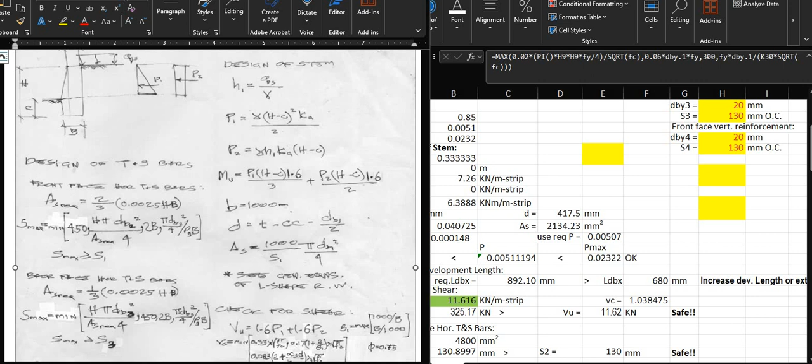For the design of gravity wall, these are the dimensions: you have the overall height H, small c for the height of fill exposed outside, thickness T at the upper base, capital B as thickness of wall at the lower base, surcharge, and then the lateral forces P1 and P2.

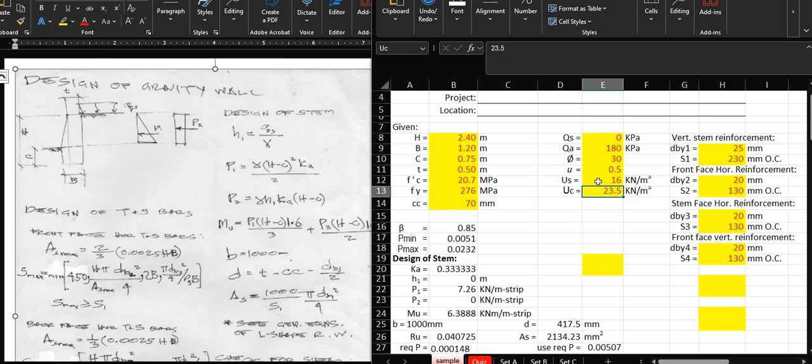Then we have thickness T, F prime C, Fy, and clear cover. Then you have surcharge Q sub S, Q allowable, internal friction phi, coefficient of friction mu, unit weight of soil, and unit weight of concrete. For unit weight of soil, that's the name I gave it.

For the rebars, let's look at this figure. dBy1 is shown here - this is actually the vertical stem reinforcement. When we say stem, this is the part of the gravity retaining wall that's attached to the soil or retained soil, so that's the stem face. The front face with the inclined part is the exposed part. So dBy1 is the vertical stem reinforcement.

And then you also have S1. Don't get confused because in my spreadsheet I put dBy1, but actually here it's dB1. So I can edit this here - then dB2.

This is the front face horizontal reinforcement, DB2, including up to the top here - the front face horizontal reinforcement. Then DB3 is the stem face horizontal reinforcement. And DB4 is the front face vertical reinforcement.

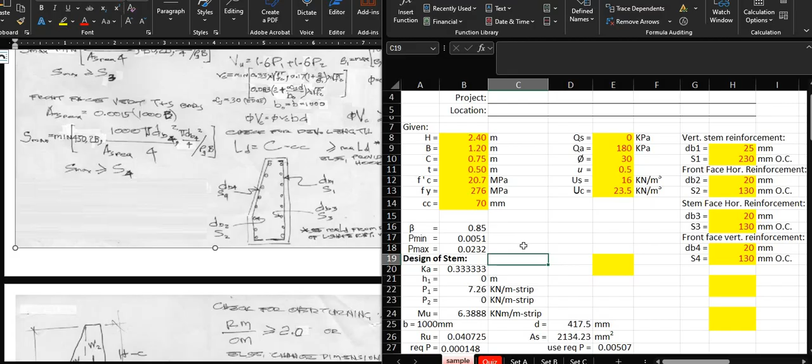Next, of course, we compute the basic constants or basic parameters, which include beta, rho minimum - these are the equations for rho max, rho min, and beta.

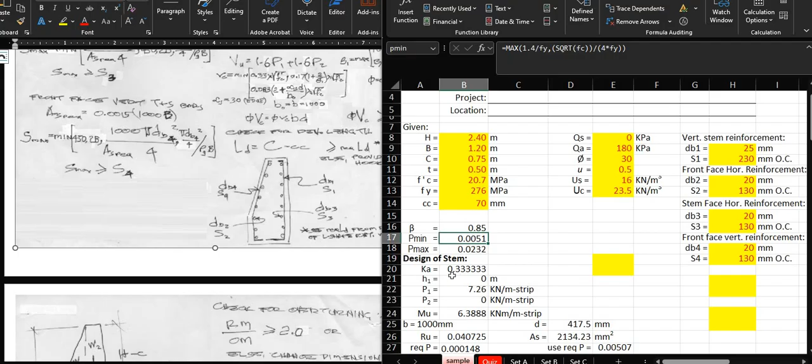Then this is step 1, K sub A. Then this is step 2. And then finally your moment. Now K sub A is 1 minus sine phi all over 1 plus sine phi.

What is this equation? It is actually the height of the equivalent rectangular polygon due to the surcharge. So the equivalent height of the polygon due to surcharge is H1. Take note that H1 is not capital H minus C - it is equal to surcharge divided by the unit weight of soil. So that's the equivalent height.

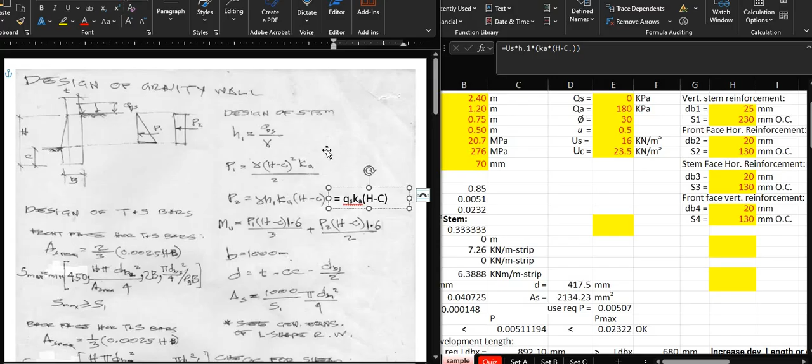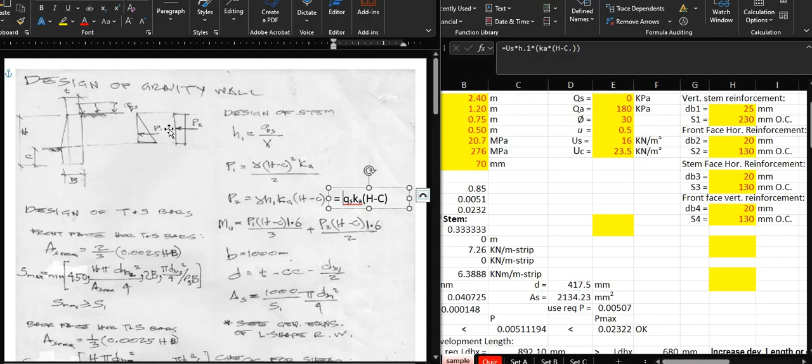So if we compute the lateral force due to surcharge, it becomes unit weight times H1 times K sub A. Why do we multiply by unit weight? Because it's an equivalent height that we converted to soil. But actually we can also go back to the original equation where P sub 2 equals surcharge multiplied by K sub A times the height of the polygon - that also works.

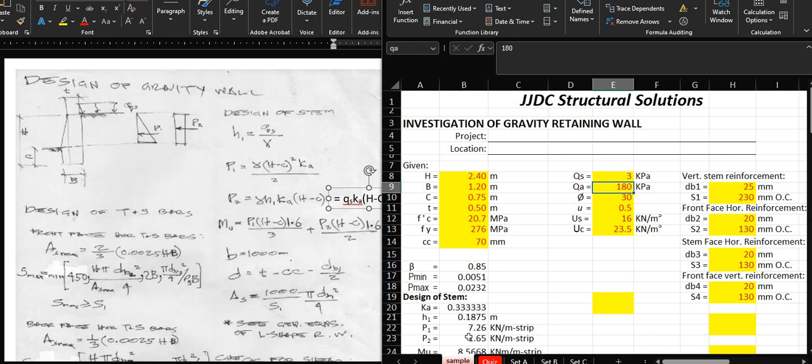Let's take a sample here - let's set the value of surcharge to 3. So now P2 will have a value. Let's follow this equation and see what happens: this equals Q sub S times K sub A times H minus C. So they're the same - equals, true. So this is still correct.

Next, let me put this back to 0. So after solving your lateral forces P1, P2, you now compute your M sub U.

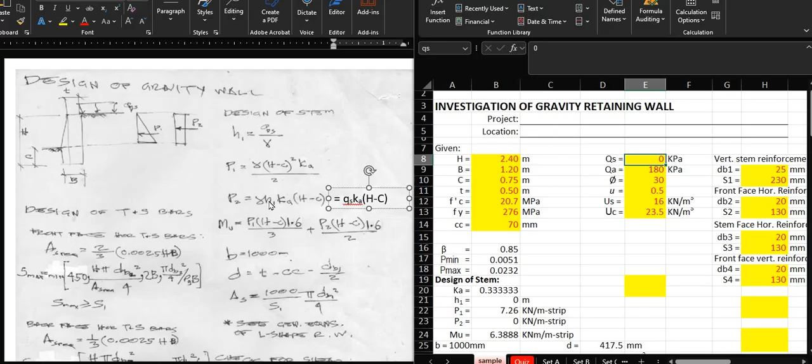For all retaining walls, we always assume a meter strip, so our B here is 1,000 mm. And then we assume a singly reinforced cantilever beam.

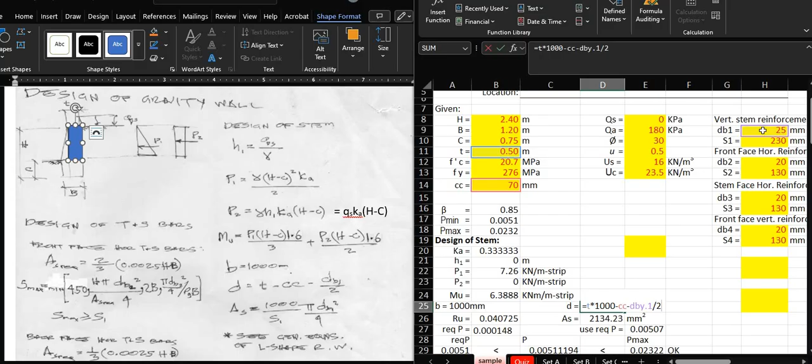Which is, let's say, this - the height of the cantilever beam is equal to T. So the effective depth would be thickness minus clear cover of 75 mm - actually 70 mm here, so clear cover of 70 minus dB all over 2. Now the diameter of bar we use here is dB1, dBy1. So that's T minus CC minus dBy1 all over 2.

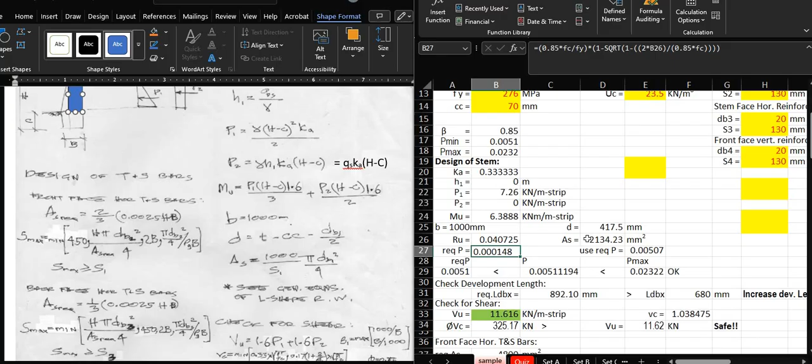Next, this is actually the general equations for a singly reinforced beam. From here, after solving the MU, you compute R sub U, which is equal to MU divided by 0.9 times B times D squared. And our AS is this equation - 1,000 divided by S1, where S1 is the spacing of DB1.